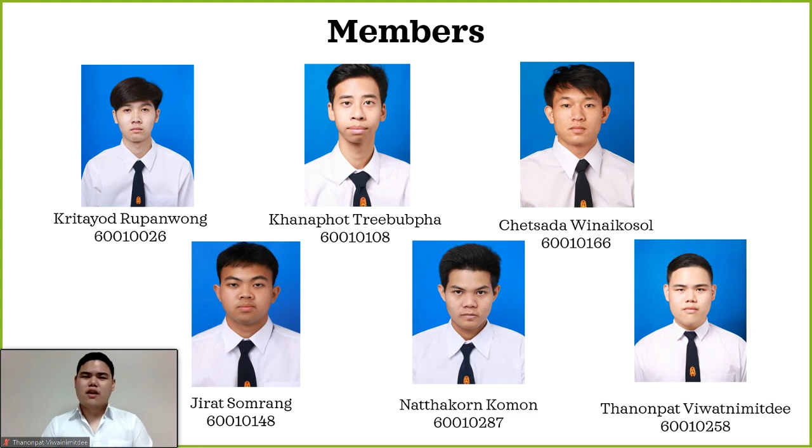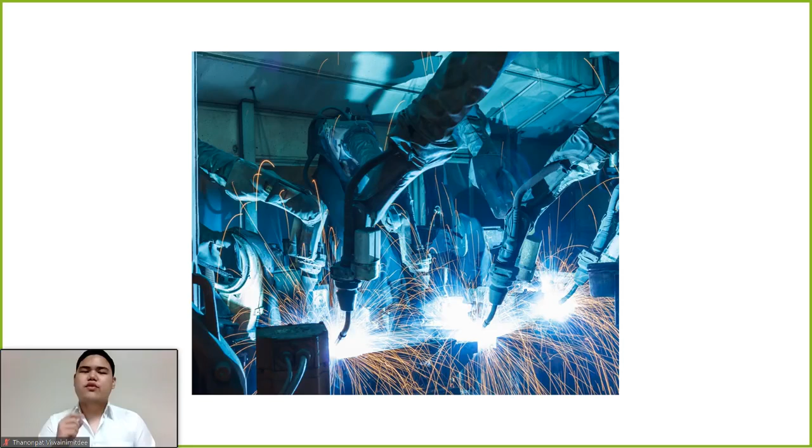Presently, the robot arm is one of the most important things in industry. It can be applied in many ways in the manufacturing process to develop world industry into a smart factory in the future, and that is the reason it causes a lot of change in many ways in industry.

We have divided this presentation into four main parts. Firstly, we would like to present about robotic arms in manufacturing. Secondly, we will focus on the impacts of robots on future employment. Thirdly, we are going to talk about the impacts of robots on productivity. Fourthly, we will consider the impact of robots on environment. And finally, we would like to give you a conclusion of our presentation. Let's start with the first topic, robotic arms in manufacturing.

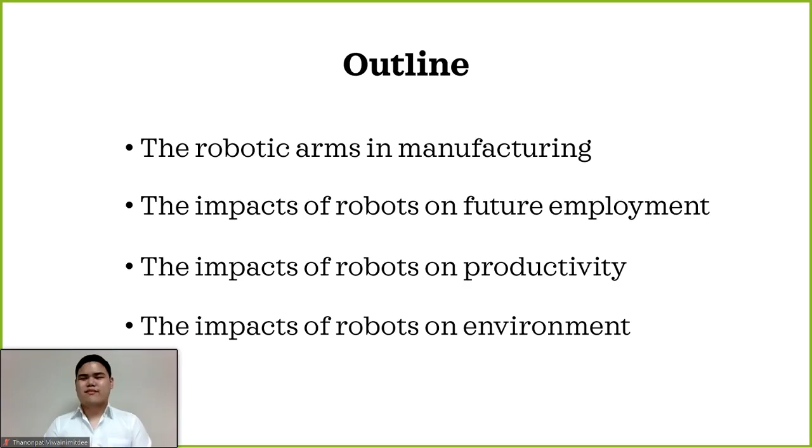I will focus on robotic arms in manufacturing. In the manufacturing world, one of the most common robots is the robotic arm. This metal arm, usually made up of 4 joints, can be used for several manufacturing applications, including welding, material handling, and material removal. Furthermore, the industrial robotic arm is a marvel of engineering in that it reacts similarly to a human arm. The robot's arm closely resembles a human's arm with a forearm, elbow, and shoulder.

That is where the similarity ends, though. Industrial robotic arms move much faster than human arms, and without proper safety measures can be dangerous. Robotic arms usually have some form of safety package or sensor available to ensure the safety of human workers. In addition, an industrial robot's arm not only increases the speed of the manufacturing process but also the accuracy and precision. This robotic arm cuts down on worker error and labor costs. This metal marvel will continue to operate in manufacturing for years to come, lifting and moving, until the next fast innovation is introduced.

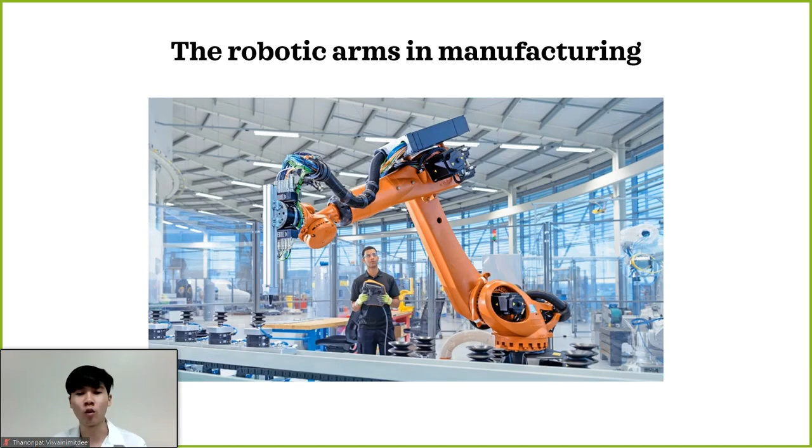Now I will consider the impact of robots on future employment. Technology is continuously progressing in the manufacturing industry. With new developments in automation, the industry is introducing the use of robots in the workplace. There are many concerns that robots will essentially take over manufacturing, leaving people without jobs and changing the industry as a whole. But is this fear of robots justified? Will the ever-growing automation capability of humanity lead to a decrease or an increase of jobs?

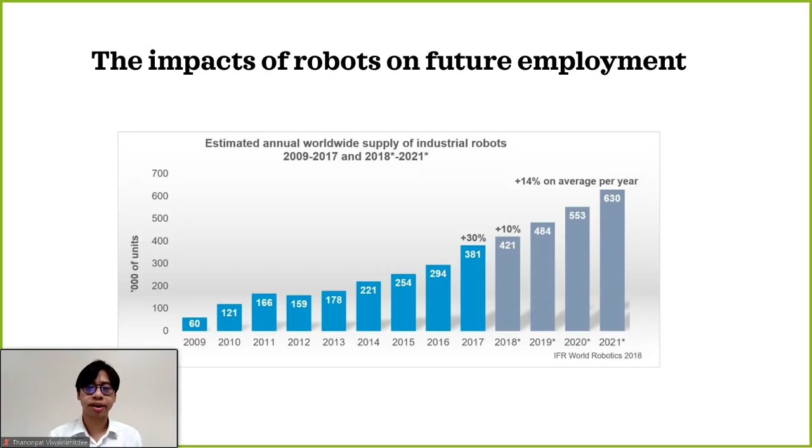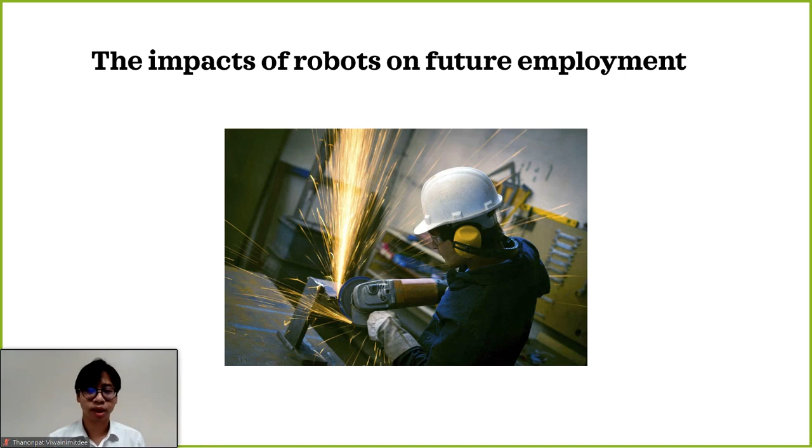The automation experienced during the Industrial Revolution and in past decades, including the introduction of robots and collaborative robots, have actually created safer, more efficient, and more pleasant working environments. As shown in the past, automation developments such as the implementation of robotics will lead to jobs changing and tasks being reallocated. The fact that robots take over repetitive and dangerous tasks allows employees to move on to higher skill tasks such as production planning. So yes, some jobs will be taken over by robots and other automated solutions, but robots will more likely complement than replace people.

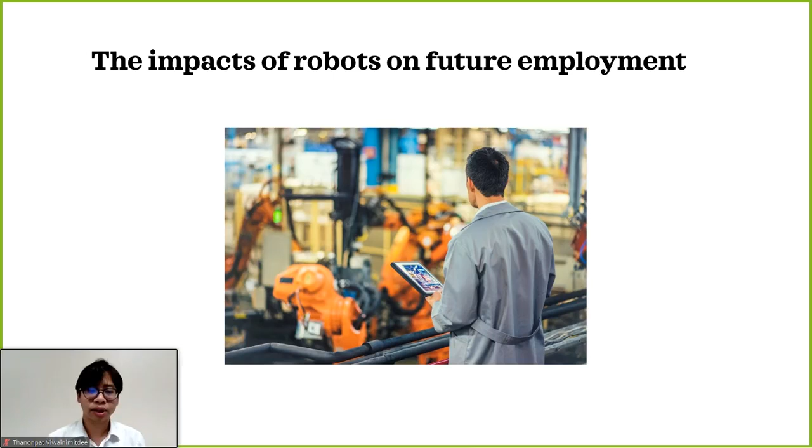Now, the impact of robotics on productivity. The fact that industrial robots can be counted on to deliver excellent results on a consistent basis is one of the primary reasons that so many manufacturers have begun implementing these machines in different manufacturing applications.

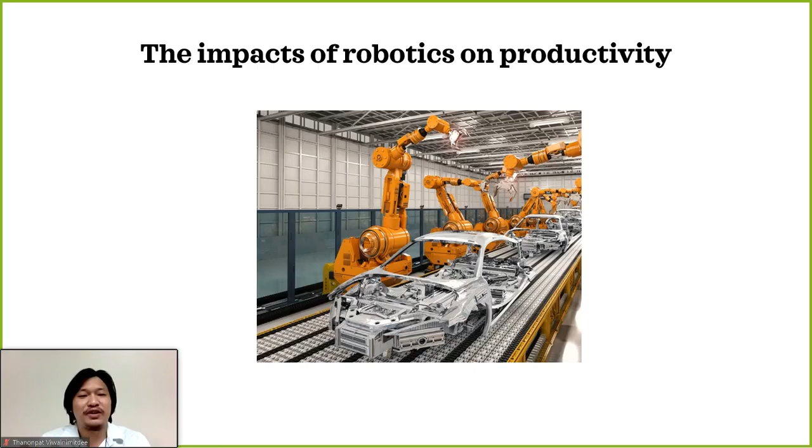Industrial robots are also popular in welding applications, with the ability to deliver a perfectly welded seam every single time in less time than even the most experienced humans would take. That means manufacturers can ramp up production without having to worry about quality slipping. So when it comes to adding an industrial robot to a company's production line, there is no doubt it can speed up production, keep workers safe, ensure quality results, and save the company money over time.

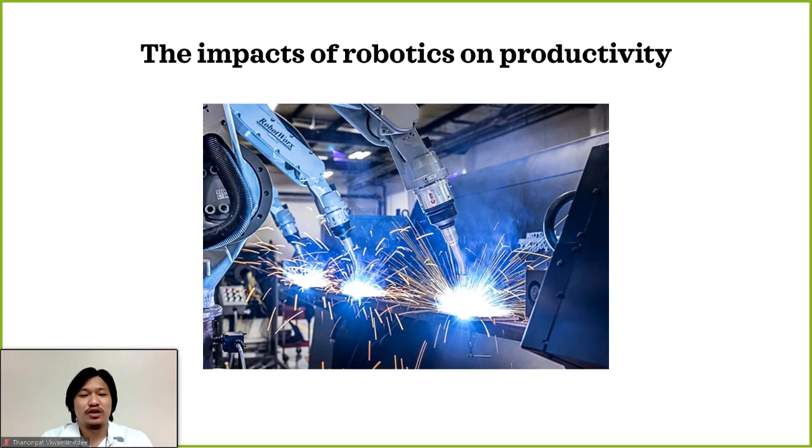Now, the impact of robots on the environment. There is growing interest in green manufacturing all around the world. To be green means energy efficiency and an environmentally friendly manufacturing process.

Replacing workers with robots can change the environment inside the factory. Since there are no longer humans working, there don't have to be regulations on the temperature inside the factory, or whether the lights are on or off, reducing energy used for air conditioning, heat, and lighting in the facility. A greener workplace will be promoted.

Next, the efficiency and precision of robots will decrease the amount of scrap created within the workplace. Less scrap means less waste entering the environment. Impacting the environment through waste reduction and energy conservation will allow companies to become green and help conserve the environment.

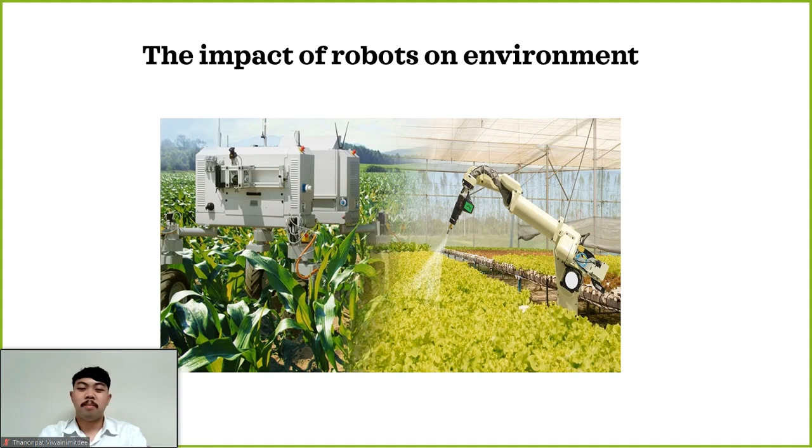This brings us to the end of our presentation. We would have to know how much robotic arms should be encouraged for use in manufacturing. So I will summarize the main points of our presentation.

First, we talked about robotic arms in manufacturing. It might look like a human arm, but it is much more effective if properly measured, and it is developed to be very accurate and precise, which helps reduce worker error and labor costs.

Second, we mentioned the impacts of robots on future employment. We don't want everyone to think that more developed robots will take over human jobs, but rather that robots complement boring, repetitive, and dangerous jobs for workers, allowing humans to move to jobs that require higher skills, and will create new jobs to support human jobs.

Third, we mentioned the impact of robots on productivity. Robots have been introduced in various industries and have received very good results. Robots can speed up production, keep workers safe, ensure higher quality results, and save companies money over time.

And last, we talked about the impacts of robots on the environment. The benefit that comes with robots is eco-friendliness, because when no humans are in the manufacturing process, there is no need to adjust the environment to be friendly to humans, meaning no need for air conditioners, heaters, or worrying about turning lights on or off. It can also reduce waste or scrap from the manufacturing process, because robots work efficiently and effectively.

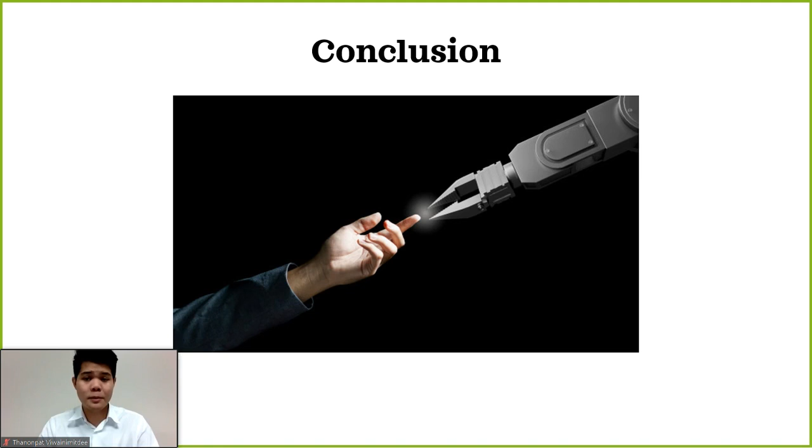Before I finish, let me just say, do not be afraid of change. If we do not change, the world will not develop anymore. The presentation has ended. Thank you for your attention.